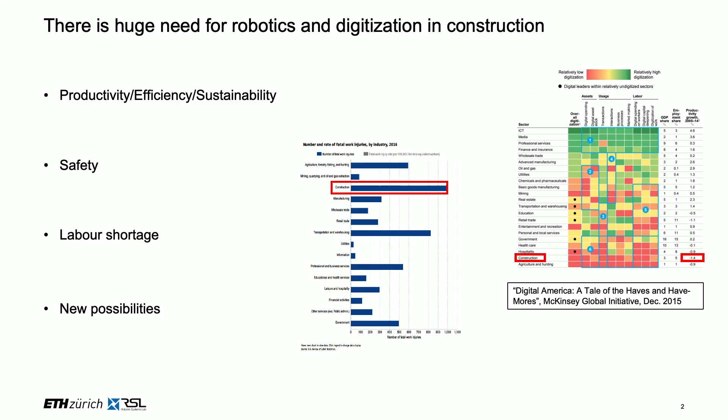I think for all of these aspects, robotics can help quite a bit to make us better in that sense, but also to open up new possibilities, new ways in how we can do things, new products that we can actually create in construction. I try to distill this into different subcategories of what are the pain points that we see on the construction side and where robotics might help in the future.

First thing is that everything keeps slipping. People don't show up, material doesn't show up. That means pretty much all the construction projects have delays, so 70% of them. It's super hard to collaborate. You have subgroups and they have very limited communication in between, which means there too we can improve a lot.

Because robotics helps us in distributing data significantly better. There's very limited project insight that we're typically having, and there's a lot of wasted time, a lot of waiting on construction sites, and we heard it from Ryan before. If we know at what exact time I'm done with my job and I can call in the truck to do the next job again, I think that makes us a lot more efficient in the longer term future.

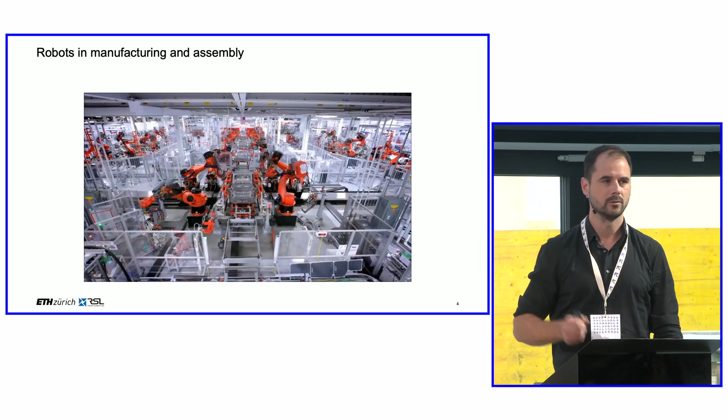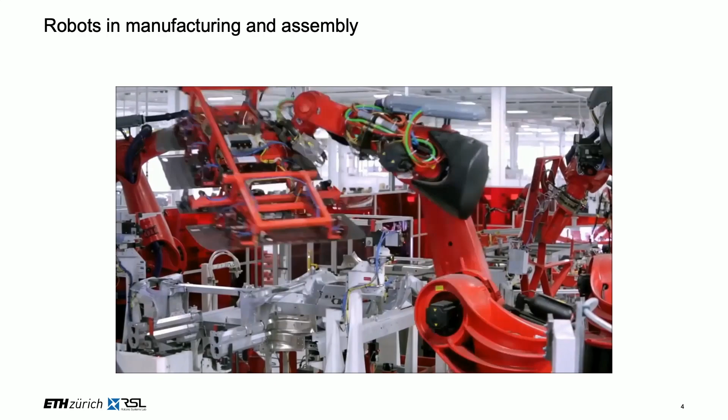Now, if you look at other industries, they have overcome these issues quite a while ago. If you go to manufacturing assembly, you see images like this, dozens of robot arms that create products completely automated, so we have no humans in these environments, and that literally helped us to make things cheap, but also much more precise and in exactly predefined timings.

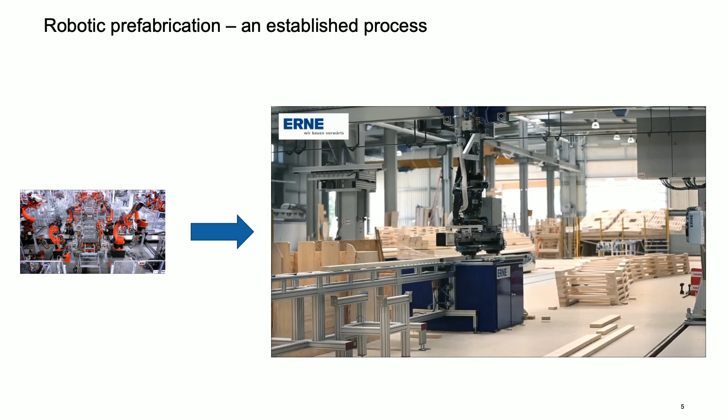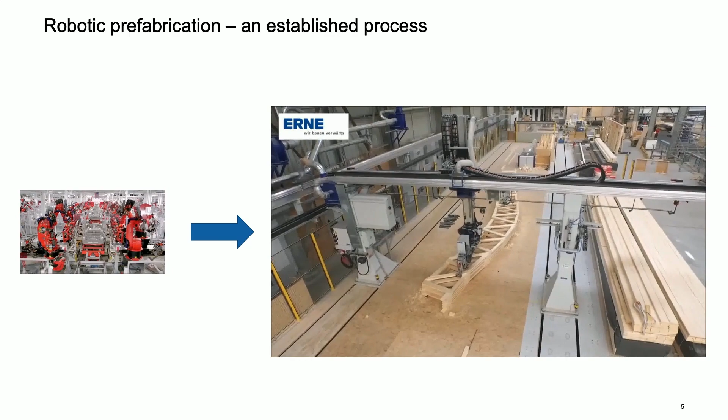Now, if you take this paradigm and just move that to the construction world, you would essentially end up with something like this. This was an example where some research was done by colleagues at ETH and then later commercialized through, for example, the company ERNE, where the same kind of technology using robotic arms is used in order to prefabricate certain aspects. This prefabrication here was used in order to build up a roof of that building.

We're talking here about 500,000 to 1 million nails, about 50,000 timber slats, which means if you would do that by hand in this exact geometry, it's almost impossible. Only robot technology allows us to do this.

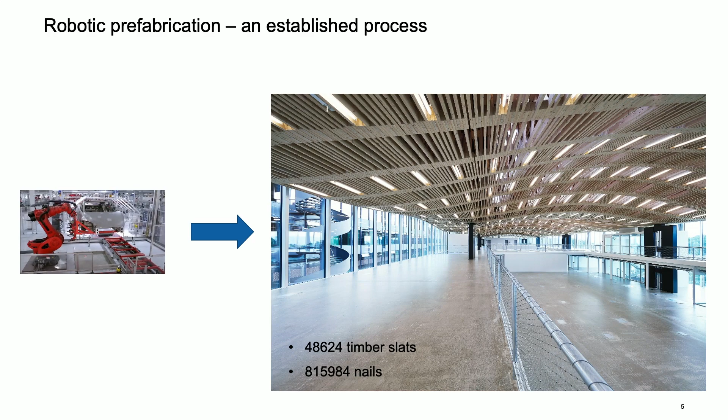Now, the title that I had in the beginning was talking about mobile systems, which means instead of having a gantry system, what we want to do is make systems that are moving around. And that's not something new. If you look at what exists today, you find products, for example, Hilti Jaibot, which is moving around and drilling holes. There are many others in that field, used for different types of applications.

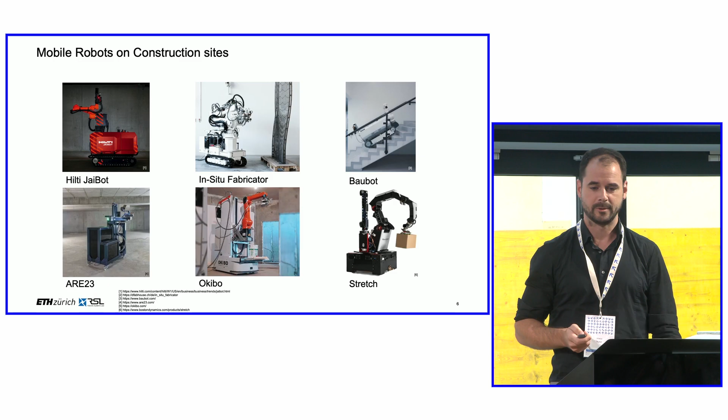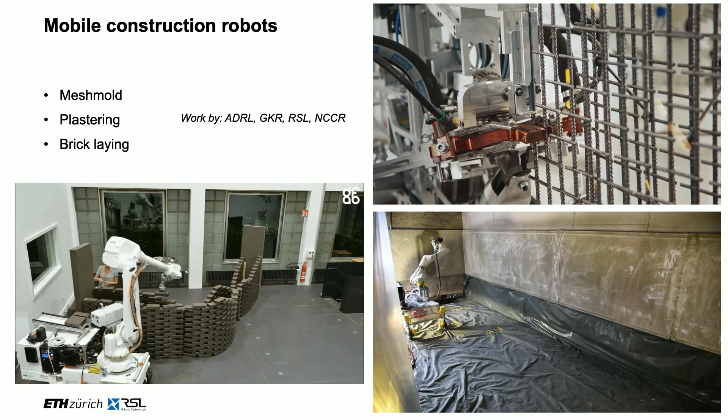Here again, a few examples of what is done today. That's more from the research perspective of some of our colleagues at ETH and us doing bricklaying, mesh molding, or in this case, concrete spraying.

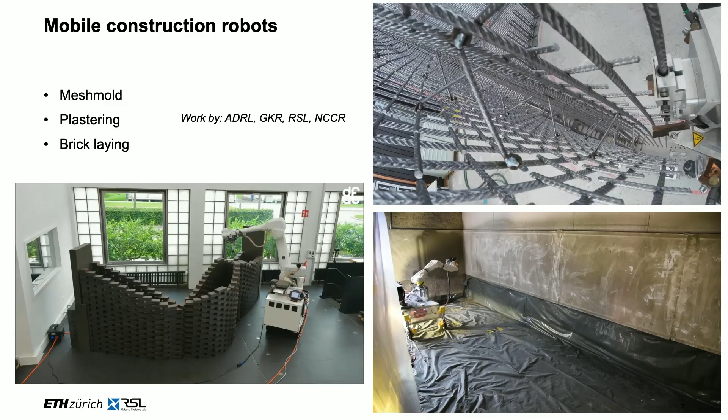And it's not only about doing jobs that we do today, but doing it in automated fashion. It's also about doing things in geometries and shapes that we could not do in the past. Here are a few examples of that: how you can make super nice brick walls with nice shapes, acoustic walls. You can make plastered walls and they're not flat anymore, but have nice structures inside.

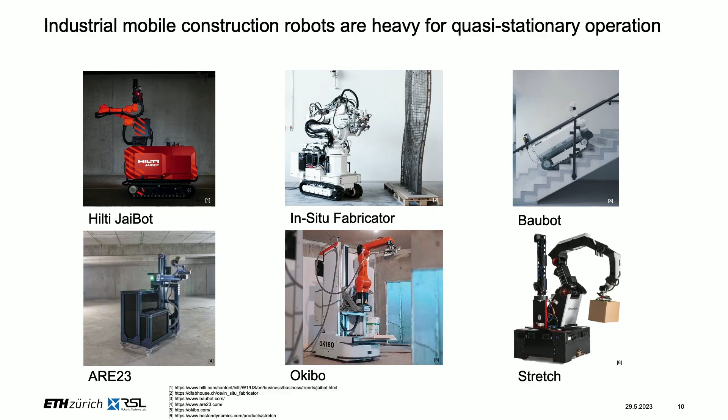But again, if you're looking at this thing, this is not really mobile robotics. If you ask a robotics researcher, they will tell you, well, that's a quasi-stationary system. You just move it around and then you have it operating again. And I think that is just limited in terms of capabilities and in ways we can scale it.

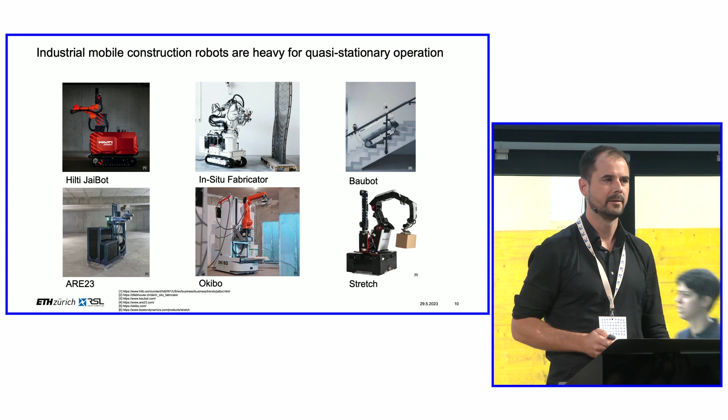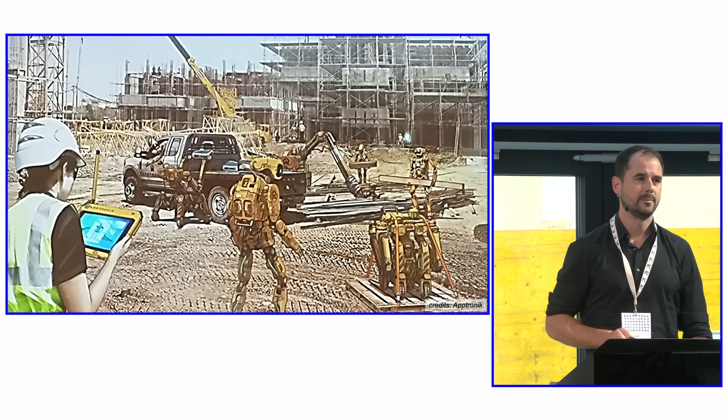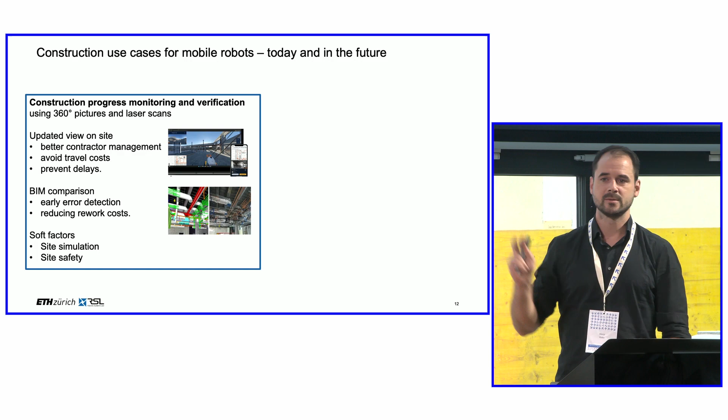Now that's one thing which is today, and today already implemented in some innovative environments. I think the future goes a step further, where we're going to have mobile systems that help us do the job. That means we can have systems on job sites which may work with superhuman precision, which allow us to increase job site safety and also increase the scalability, because they're just permanently available.

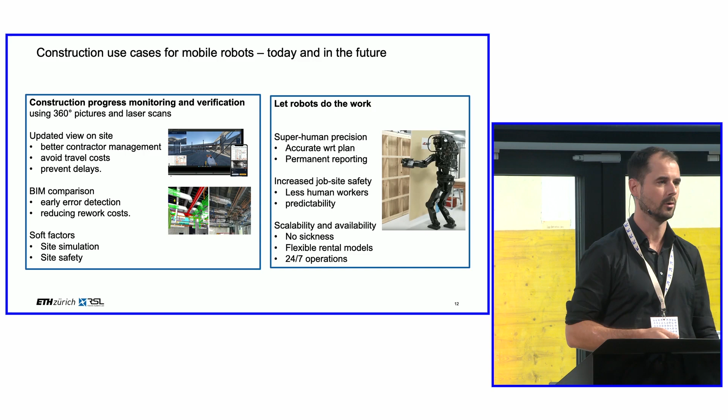And if we need 2, we get 2, and if we need 10, we get 10. We don't have to go on a job market and find people and ask them, please, could you come tomorrow to work?

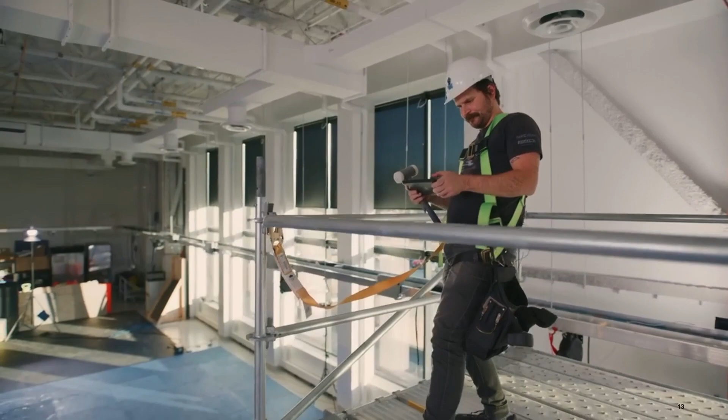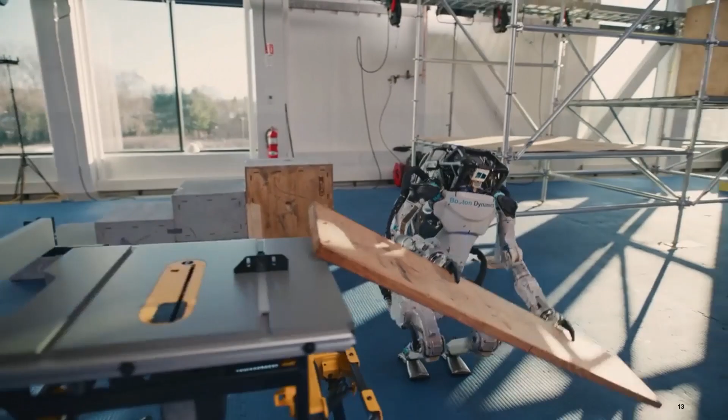Here is a short video of some of our colleagues that are here in the room, so it's a good coincidence, by Boston Dynamics that shows how this may look like in the future. I mean, you have to know this is not something that works all the time in any kind of construction environment, but it shows where technology stands and what in principle could be possible today.

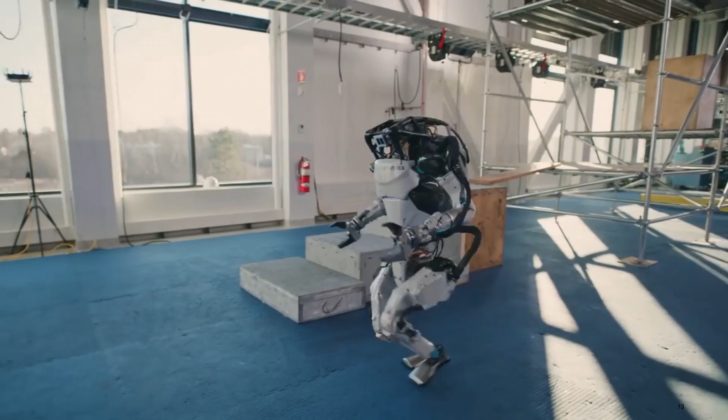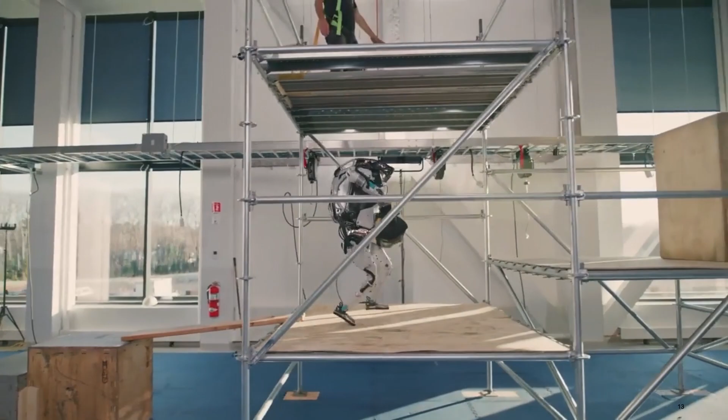So this is Boston Dynamics Atlas working on a potential construction site, and shows you how it's using hands to move objects, how it's mobile enough to work in such environments, in a kind of artificial case where a guy is calling it in order to bring up some tools. But I think it's a very nice illustration of what might be possible in the future.

Questionable whether you have to do these kind of things on a construction site, whether they would even allow you to do it, but it's a cool demonstration of capabilities. Not all construction workers can do this, probably.

And I think there are 3 main elements happening today which make this video not a utopic future that might happen in 100 years, but something that is coming to reality rather soon. First of all, it's not only the small companies and small universities doing things, but large players coming to market with mobile systems, whether it's quadrupeds or humanoids, and that makes it ubiquitous and available, and suddenly many people can build upon that.

Second thing is, I think we have made tremendous progress on the machine learning side to make these systems much more capable, both for mobility and interaction. And a third aspect is that construction surveying, which was a separate topic, and SLAM have reached the level where these things are fused together, such that we can really use robot technology in order to do all the construction surveying necessary.

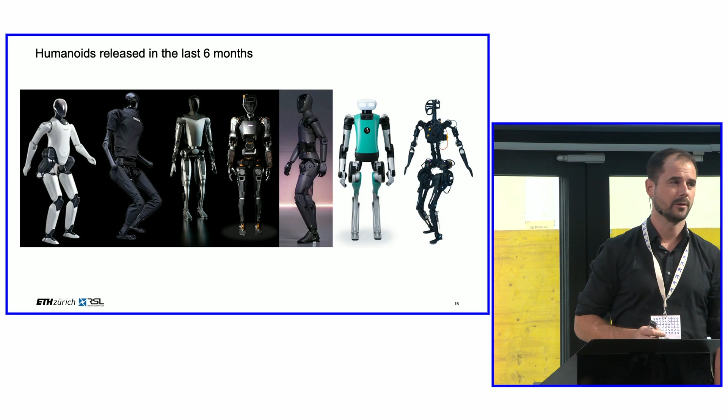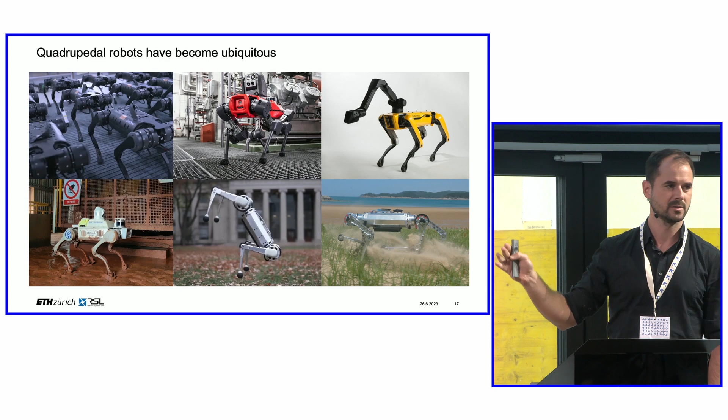First point, so this is just some illustration. Last 6 months, the humanoids that were released in this time. If you go to the quadrupedal world, it's even a step further than this. They're not only released, but there's hundreds or thousands of them in the field today. I personally have worked with this guy for many, many years.

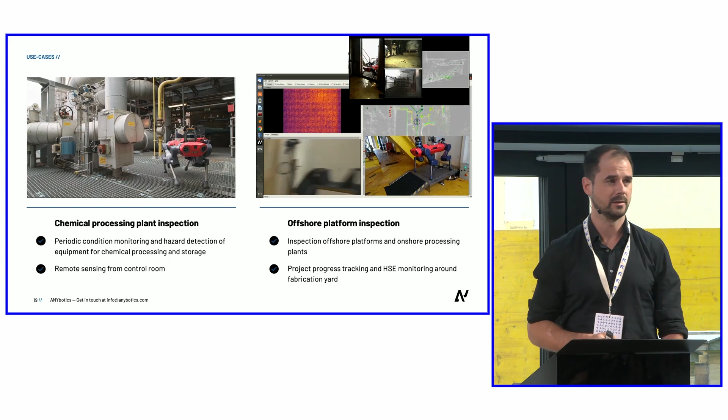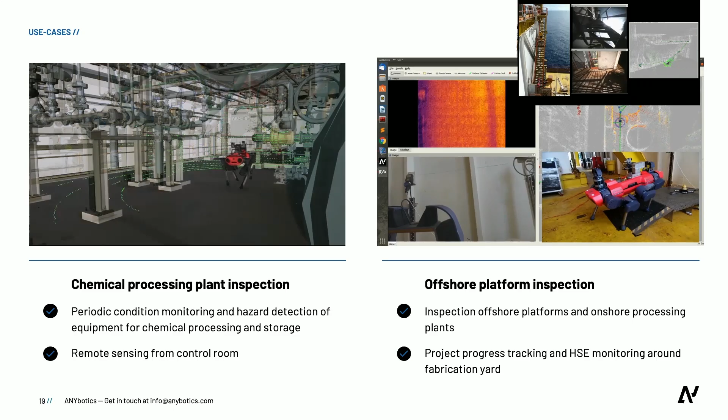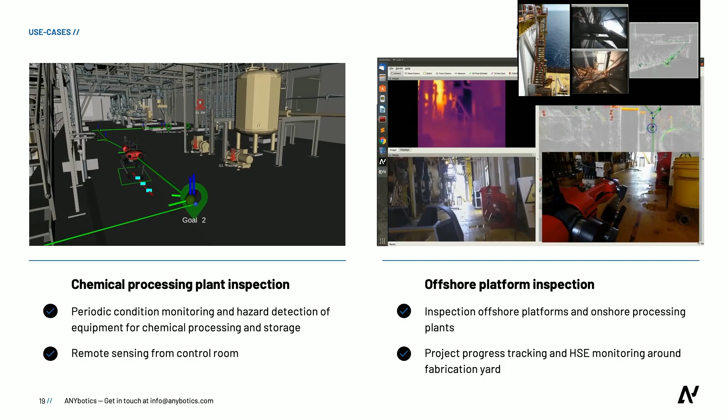What we do normally with them is that we have them operating on industrial facilities. And there it's kind of a commodity in the meanwhile for many of them, having these systems moving around doing industrial inspection, monitoring of what's happening. You see them equipped with a bunch of different sensors. On your left you see there's a digital world where you plan the whole routine and everything, and then you have the robot executing this on the actual facility. And that's the thing that also will become possible in the construction sector in the near-term future.

Second thing, making systems much more mobile and much more capable. We have been working for about 5-6 years on using machine learning, in particular paired with simulation, in order to train advanced mobility skills for these systems. And the cool thing is, in the meanwhile, there exist tools that allow us to take a laptop, simulate thousands of agents there. After a few minutes, you get a policy that you can really put on the actual real-world system.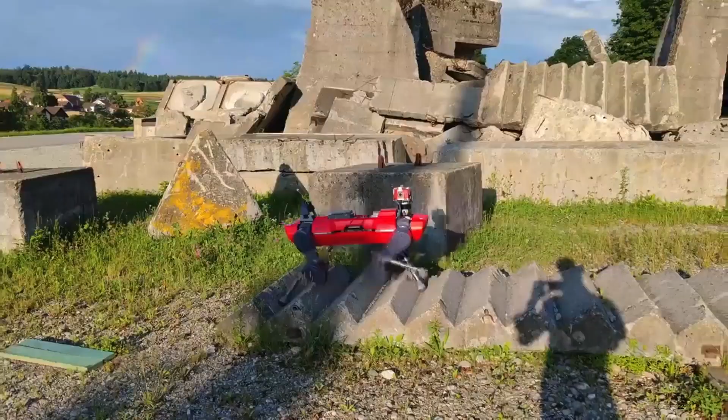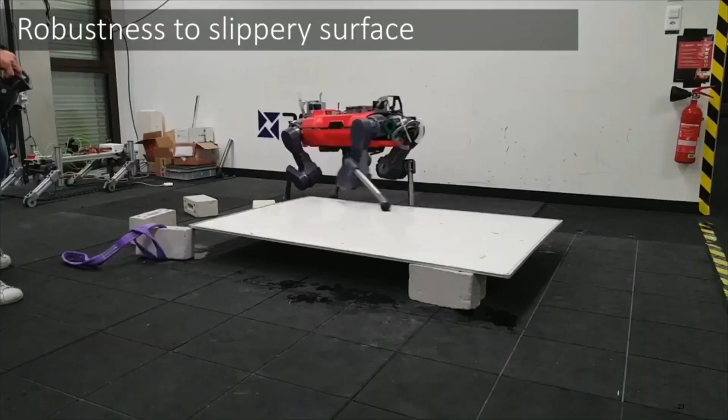And what you do here is, the better the robot becomes, the harder you make the challenges, and so on and so forth, and you grow the skill sets like a human getting better over time after they were born. And today we're able to have these machines moving around in pretty much arbitrary environments, whether there are different obstacles, geometric obstacles, natural environments. They're super robust, so you can start pulling and pushing them around on slippery surfaces with unknown obstacles, and they're just not falling anymore.

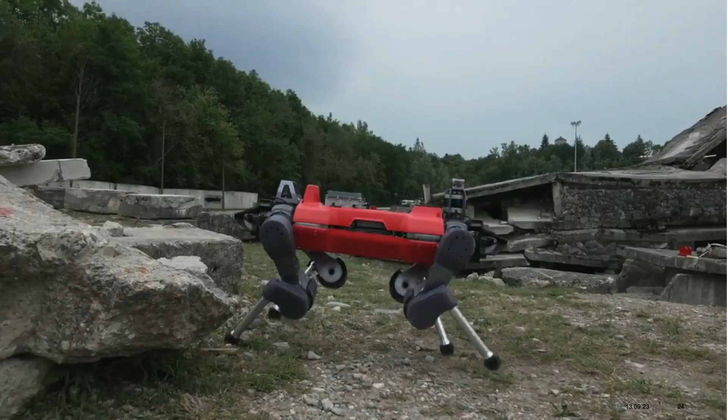So we're testing these systems very often in some of the harshest environments you can think of. And since we had a lot on reusing materials of collapsed buildings in the morning, here's an example of how these machines can deal with that. We're not transporting it around yet. They're too weak for that, but at least it shows you a little bit what these capabilities are.

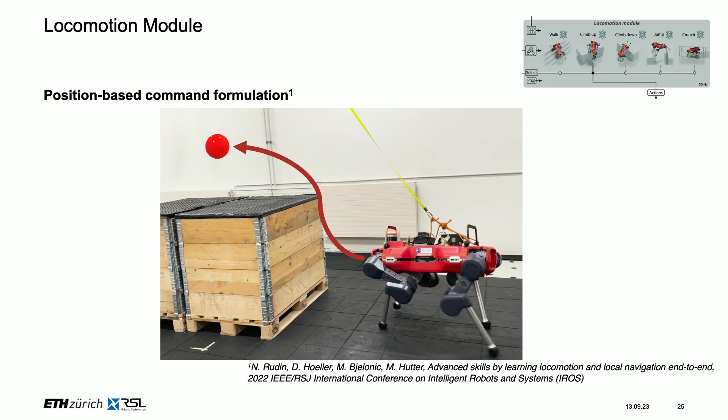And I want to do a bit of a deep dive here and show you where these technologies will be going. I assume you have problems like this. You want to have a system that can do a complex maneuver like you've seen before in the Atlas demonstration of jumping on a box. And you want to do this not only for jumping on a box, but for different types of environments. You can train that. We learn in a simulation how you can execute this jump on a box.

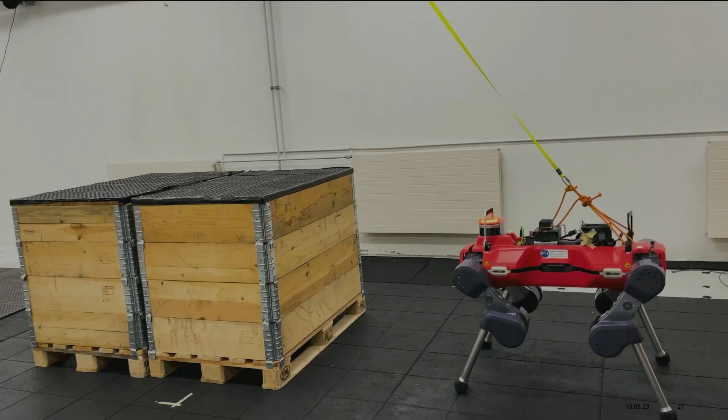You can train how to jump down off a box. You can start doing different maneuvers like getting across a gap or getting underneath a certain obstacle. And then you let the system combine all of these technologies. And again, we do this purely artificially. In a simulation, you let it train, play around with different environments, and you just do that with thousands of robots until you have a skill set that literally allows you to do all of these maneuvers in the real

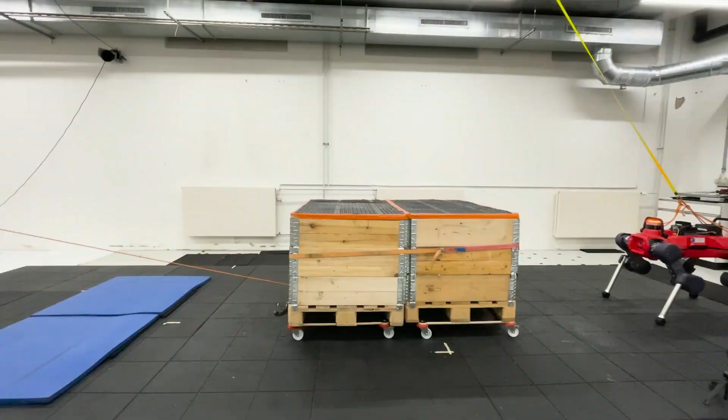world. And to show you that this is not only one pre-planned maneuver that works once in 180 times, it's super dynamic. So you move obstacles around, the robot will react to that and overcome this. So I think in the very near future, we're going to have the mobility level solved that is necessary to work in a construction-like environment.

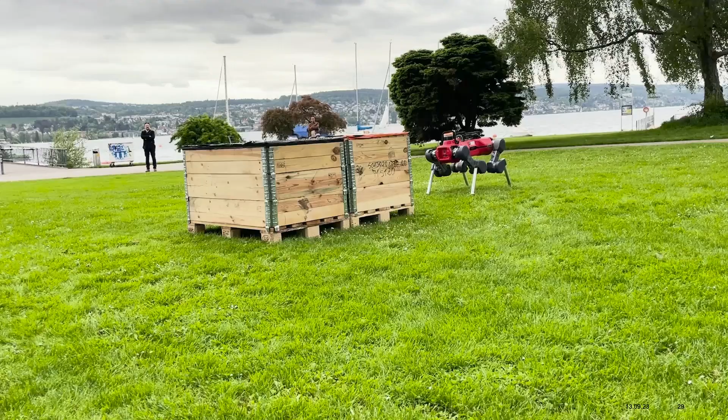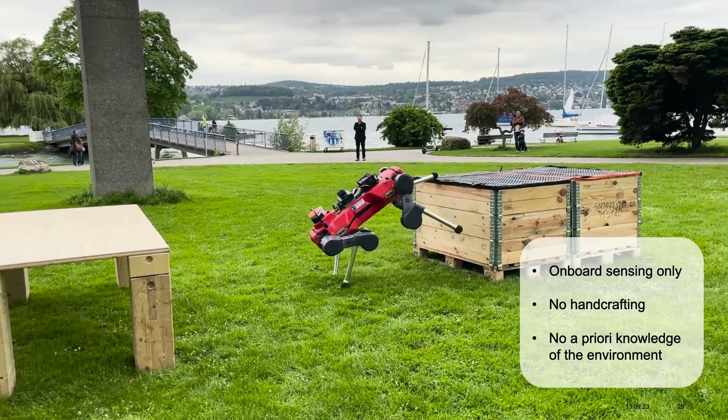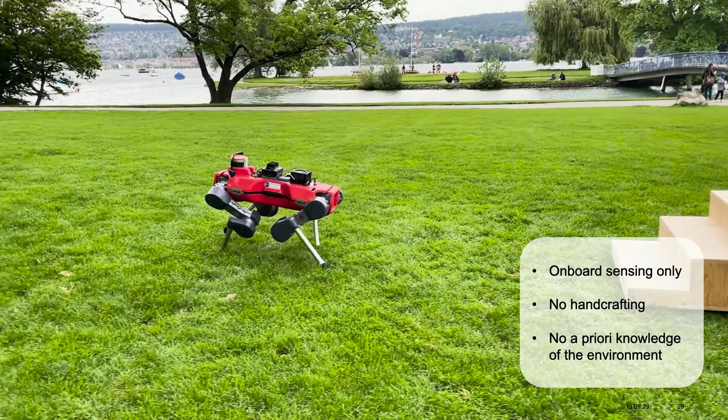Here's an example of how we're building this up in a natural environment. So this is at the lakeside in Zurich. You go there, pull up a couple of boxes, and you tell the robot, go to the other side. And it'll figure out the way and how it navigates this challenging parkour, localizes itself, figures out the maneuvers to trigger, and executes that.

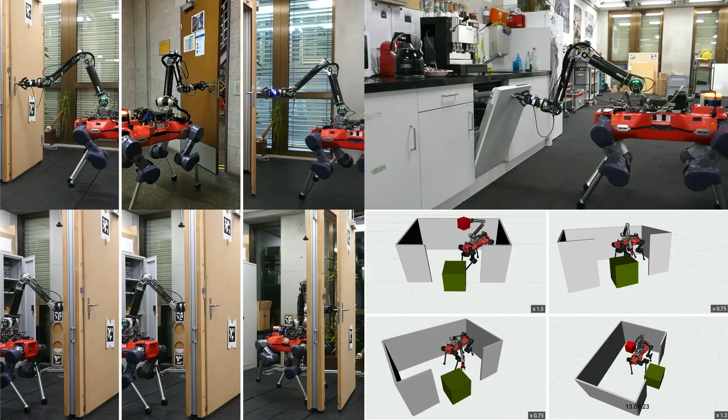Now, what I've shown you so far is the mobility aspect, getting around the environment. We have to do a lot more. We want to have systems that become actors. I think that's the next bigger step. If you look at the research on the versatility side, on the manipulation side, the gap between what humans can do and what robots can do is still huge. Nonetheless, for operation with several tools, we probably get to a level where this is sufficient.

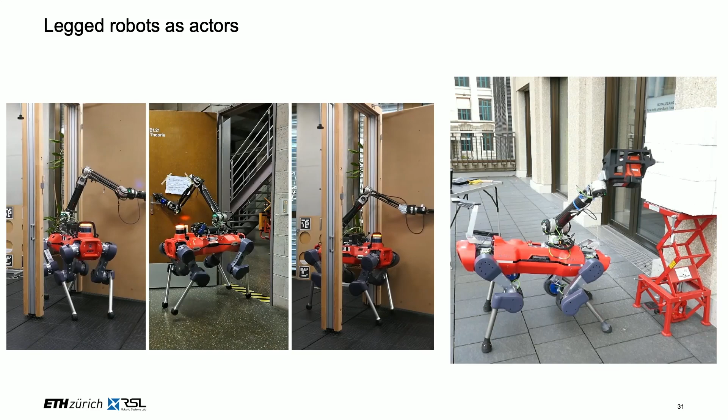So here, what we do on the left side is manipulating doors in environments where we're going to have these robots deployed. What you see on the right side: give it a tool, in that case a drill hammer, and let it execute a certain task. So that's kind of the Jaibot solution, but instead of having a 400-kilogram tracked vehicle that you have to take with an elevator to the upper floor, you have a mobile device that can move on a scaffold and drill the hole at the right location at a much cheaper price.

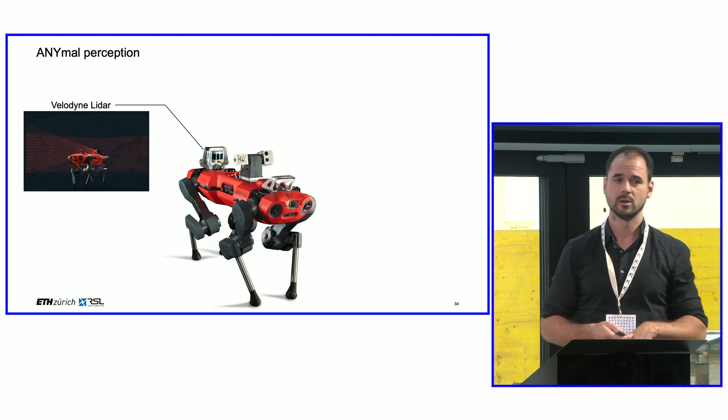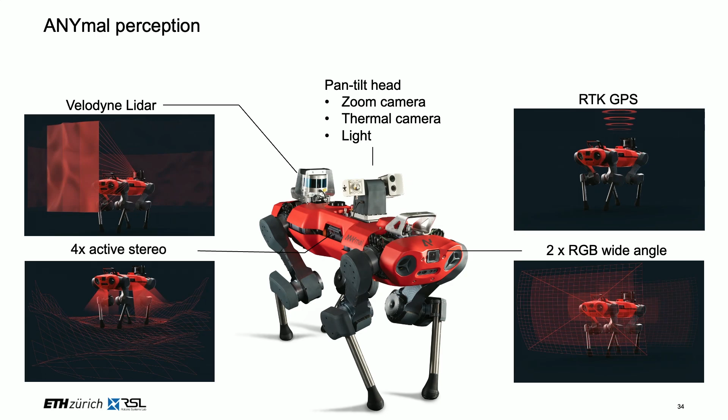Now, what is missing is that you have to combine this manipulation skill with high precision, and that's kind of the last element that I think has emerged to a level where it's becoming super useful for construction. So these robots are all equipped with LiDAR sensors, stereo cameras, and many other sensors. But what is relevant is that they can fuse this sensor information while moving around to create 3D maps and to localize within these 3D maps.

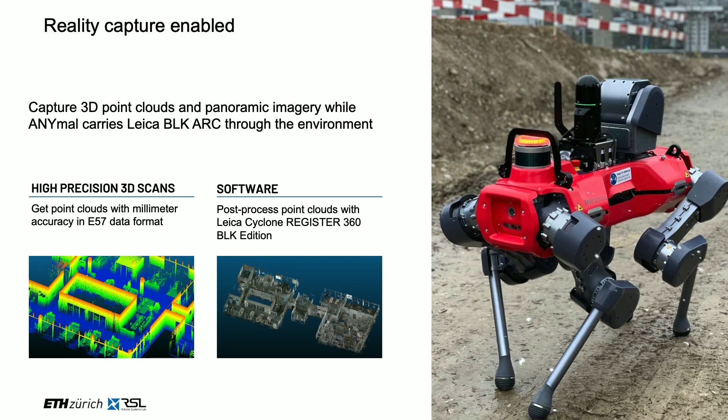And these 3D maps are not as imprecise anymore as they used to be a couple of years ago. Even with automotive-grade systems, you're going to get to a few centimeter precision, which for a lot of construction tasks globally is more than sufficient, and then locally you can do high-precision measurements in order to execute, for example, drilling a hole. And you can use this technology in order to digitize construction sites. So here is the combination of the quadruped equipped with a Leica sensor that moves around and creates a 3D map.

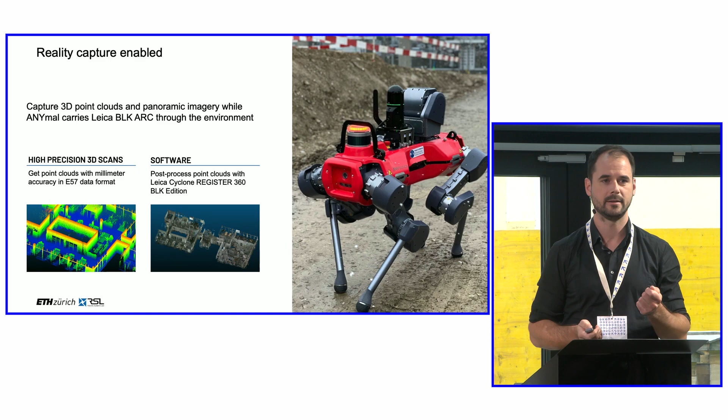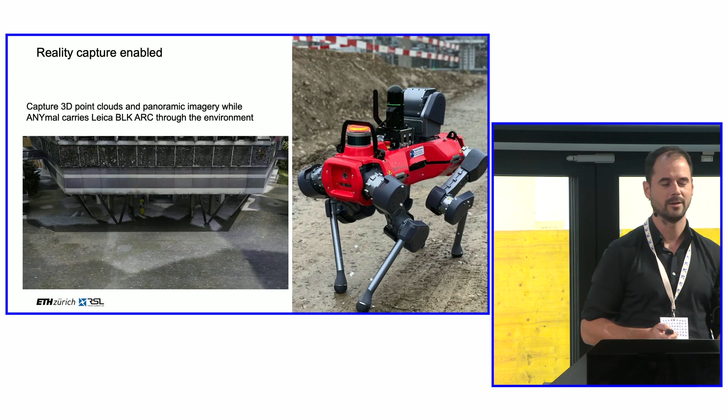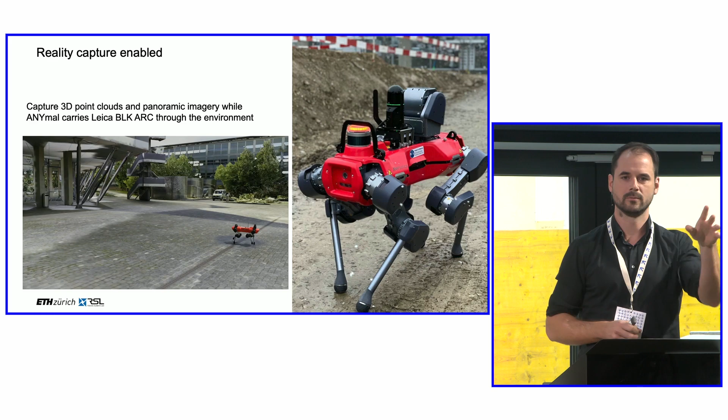And now the super cool thing is, we are creating a loop that we can close. So we have a robot that moves in the real world, that creates a 3D map of that real world, that can digitize that, and that can train again the behavior in the virtual world and execute this in the real world. So if I get a BIM model of an environment, we can train the robot to move to an arbitrary place in that virtual world, and you go and deploy it in the real world. You create the data in the real world, and you feed that back into your simulation pipeline. So this simulation execution is becoming kind of an iterative loop.

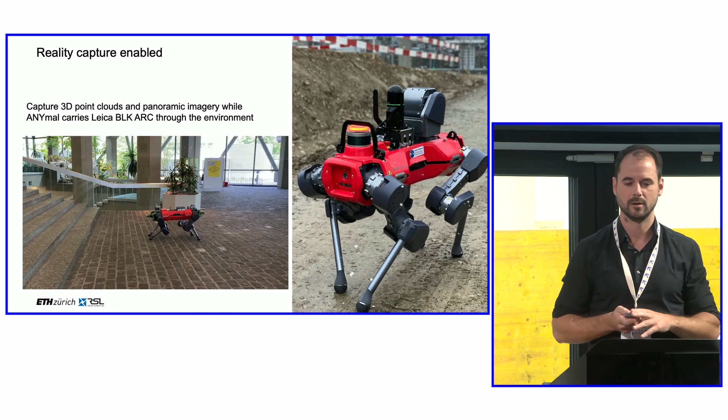And you can do this at small scale, like we did in one building, the physics building where we had the construction workshop last year. But you can also do this at larger scale. So get them moving around through parts of the city, digitize that, and then use this digital world again. In this case, it's a quadruped with wheels, but it's the same type of principle behind that.

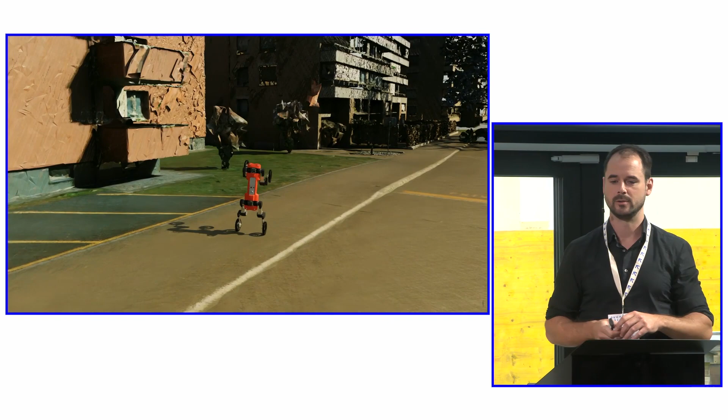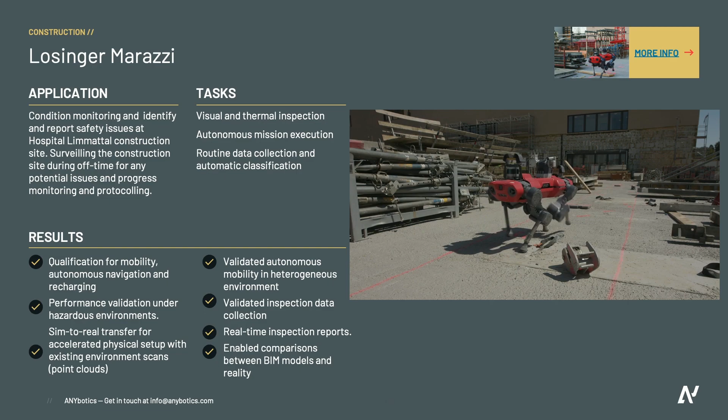Now, this enables us to deploy these systems today. What we have here is pretty much what I showed you before with the industrial inspection, but applied to the construction site. So machines that move around, that map the environment, that help generate the information necessary for the construction or job site managers, for safety-related questions, for job site management tasks, etc.

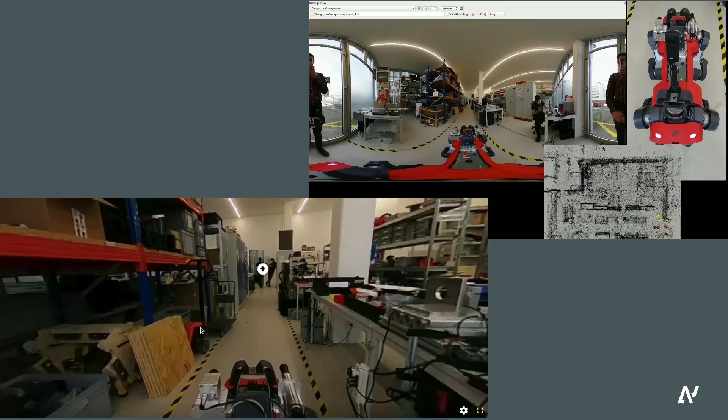You can also use this technology and then go back to data you have collected in the past, go through this in the evening, have the job site manager scrolling through the site and see what has happened in the past. And with this, my last 10 seconds are here, and I'm stopping.